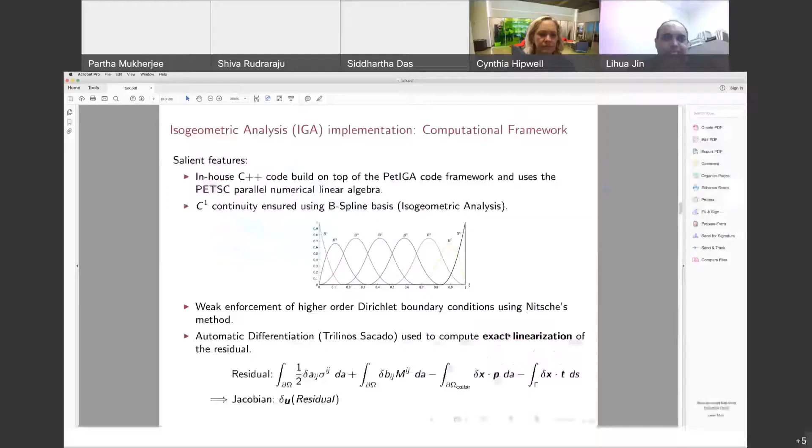In the meantime, Shiva, while you're sharing your screen, we just want to say thank you, because you only gave a few days' time, one week tops. No worries, it's really a pleasure, and I think it was sufficient time. I'm sorry I missed your first email, I'm glad you followed it up. We would like to thank you for organizing this and giving us the opportunity.

Yes, absolutely, it's a wonderful way to learn the work of so many people. I often look into the videos, and yeah, it's beautiful.

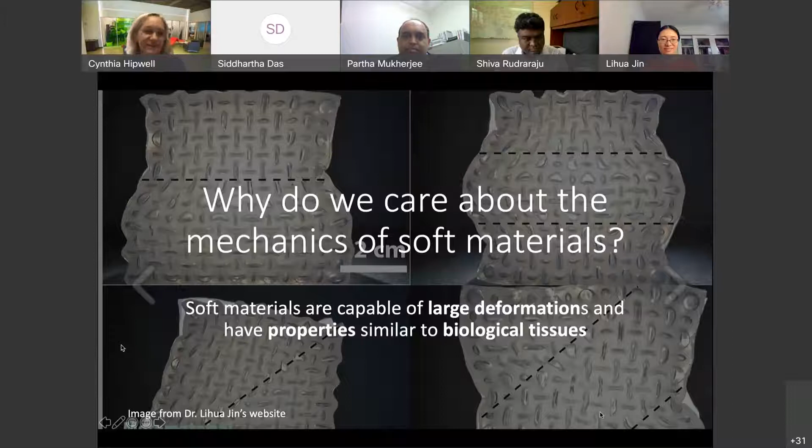Soft materials are capable of large deformations, and they have properties similar to biological tissues. This cool graphic here is actually from Dr. Jin's website, so we'll hopefully get to see more of that in her presentation.

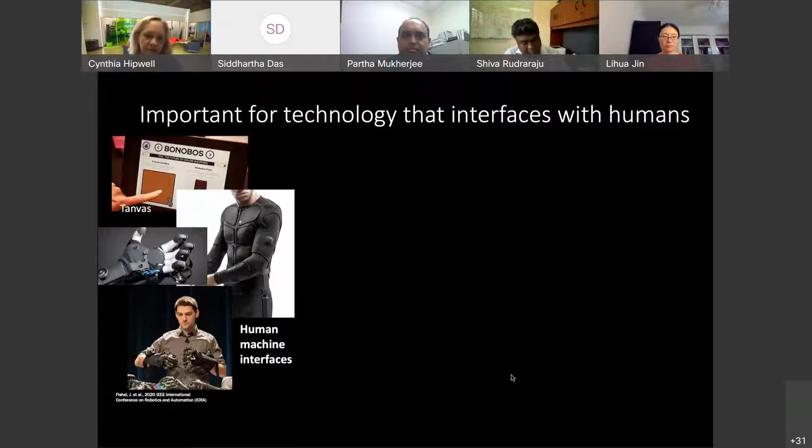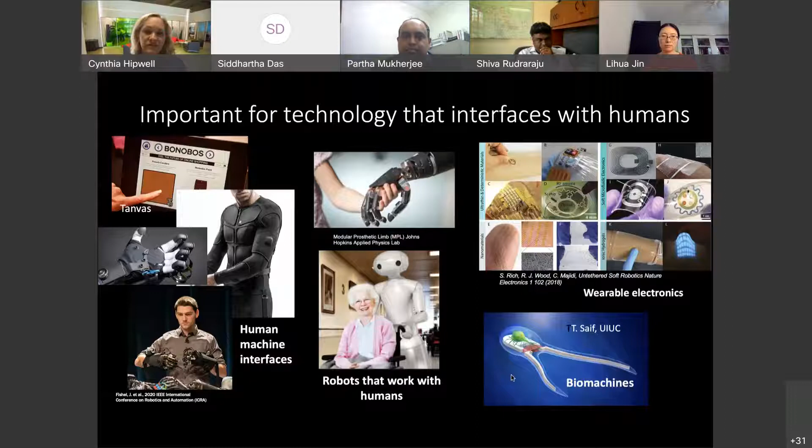This is important for technology that interfaces with humans. Examples would be human-machine interfaces for haptics, for remote touch, for being able to control human-machine interfaces with the body; for robots that work with humans so they're safe and able to interact with our soft tissues; for wearable electronics, devices that interface with our body; and also for biomachines, things inspired by biological phenomena or even self-emergent.

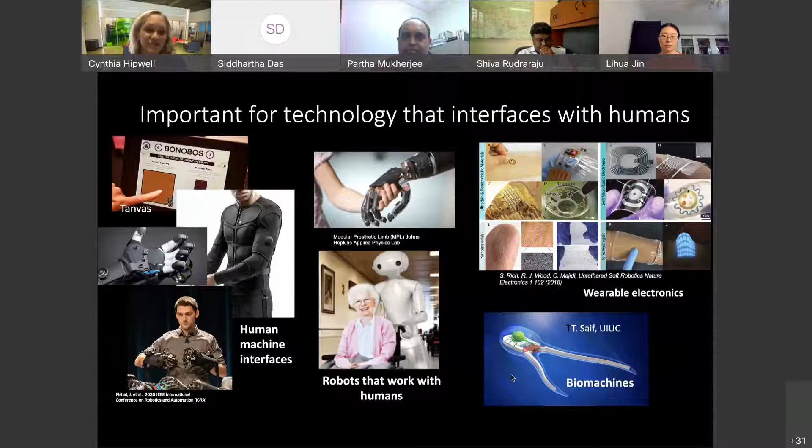So soft materials obviously bring a lot of exciting opportunity for technology, but there are a lot of challenges. We need to be able to do all the things we currently do with hard, active, electrical, and structural materials, but with soft materials. So we need active materials. We need to be able to produce a large force, often a large untethered force. We need to be able to modify friction, temperature, and optical properties, actively, with soft materials.

We need to be able to make soft circuit elements, the same types of conductors and semiconductors for wearable electronics. We have the soft interfaces, which is where our team is working, looking at how the soft materials interface with different machines and how those machines interface with them. And then looking at emergent behavior for machines that are based upon biological systems and can actually be designed to evolve over time. So there's a lot of challenges here to be able to match some of the same type of performance that we have in our hard material space.

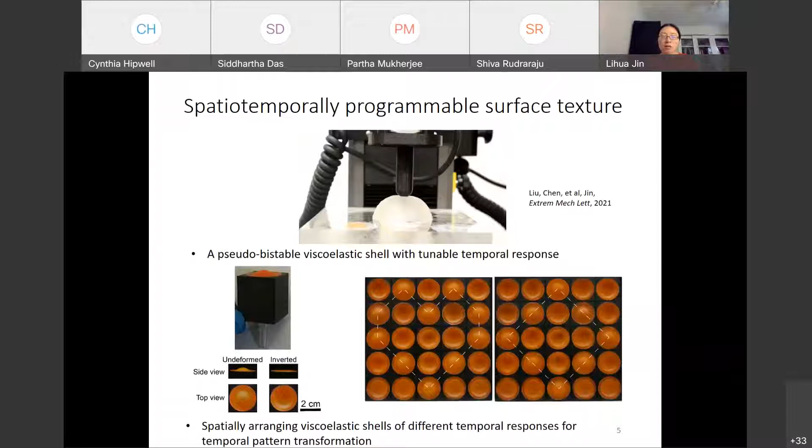To achieve that, there are a few challenges. First of all, we want to select a unit cell which can show temporal behavior. Then, moreover, this temporal behavior needs to be easily tuned by geometry or materials. Then we can combine those unit cells with different temporal behavior, and we can see a pattern evolution. And moreover, if we can further tune, assemble and reassemble, disassemble, reassemble those unit cells, we can see different patterns.

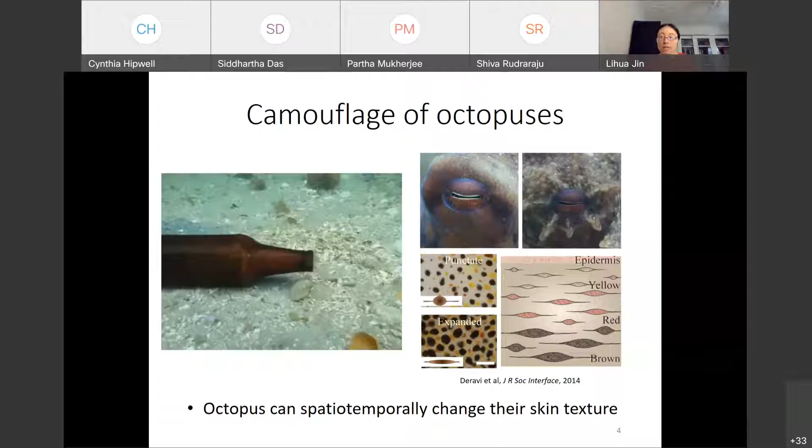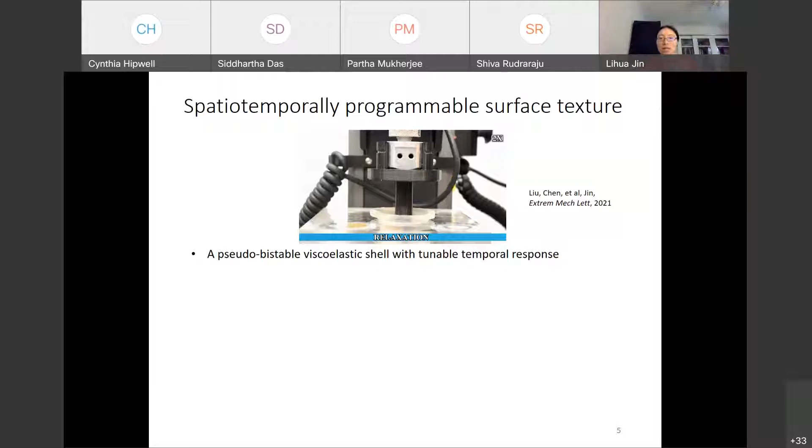Here are the unit cells we select. So we select a viscoelastic shell as our unit cell. What you see here is that we are indenting this viscoelastic shell. If I immediately remove my indentation, the shell is supposed to immediately pop back, so it is showing a monostable behavior. However, if I hold my indentation for a certain amount of time, as you see here, it does not immediately pop back.

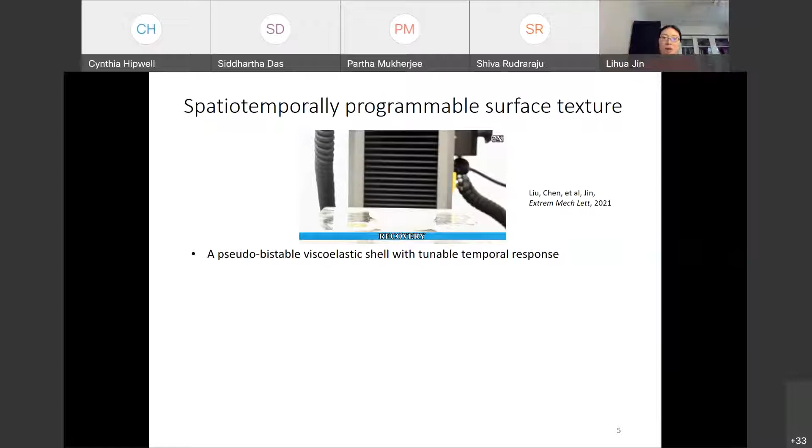But you need to wait for a certain amount of time and then it eventually pops back. This behavior is called pseudo-bistable behavior, such that it's a fake bistable. It can remain in the deformed shape or the inverted shape for a certain amount of time, but then after you wait for some amount of time, it will pop back.

Therefore, we choose this as our unit cell and bond it on a box and seal them, and then we can pneumatically actuate the deformation of the unit cell. Moreover, very soon I'm going to show you that by tuning material and geometry, we can significantly tune this snapping behavior. By combining this kind of unit cell together with different temporal behavior, we can pattern them into different surfaces, and those surfaces can also evolve as a function of time. Moreover, we can assemble, disassemble, and reassemble into different patterns.

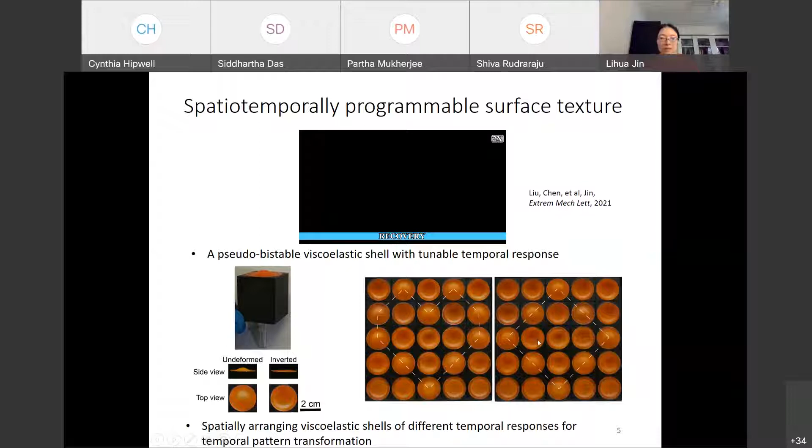Before I show you the experiment, let's first establish some theory to understand this behavior. So this is the shell geometry, and it is subject to a pressure difference. We hold the pressure difference for a certain amount of time, then plot the corresponding displacement, W here. As you can see, the displacement does not immediately recover to its undeformed shape, but it has to remain for a certain amount of time and then eventually recover its original shape.

The time we hold the sample we call T creep, and the time we have to wait we call T snap. Here we conduct both finite element analysis and also viscoelastic shell theory to analytically analyze this problem, both computationally and analytically.

To understand the mechanism, let me first plot the instantaneous pressure displacement relationship for different geometry. Here, D represents the shell thickness and R represents the radius of the shell. As you can see, the pressure displacement relationship first increases, then decreases, and increases again with the displacement. For some of the curves, it actually intersects with the x-axis, indicating a bistable behavior.

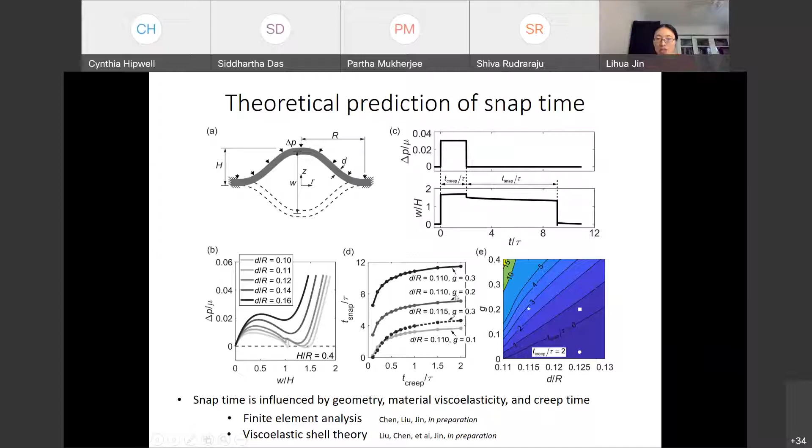Then once we understand this, we can build the unit cell and test the unit cell individually and also in an assembly.

Because this temporal behavior of the shell is intrinsically controlled by its material and geometry, in an assembly of those shells, we can use a single control by connecting all those shells together with a single control of sensor, valves, and pumps. Then we can simply control this complex spatial temporal behavior.

By a single control. As you see here, I'm showing you four different types of shells by tuning the geometry and also selecting two materials with different viscoelastic properties. We first extract air and hold for a certain amount of time. Then you see the second row pops first, after that the third row, and finally the fourth row.

Moreover, as long as we design the structure with a big enough box, we observe that the behavior of an individual unit cell and also in an assembly are similar.

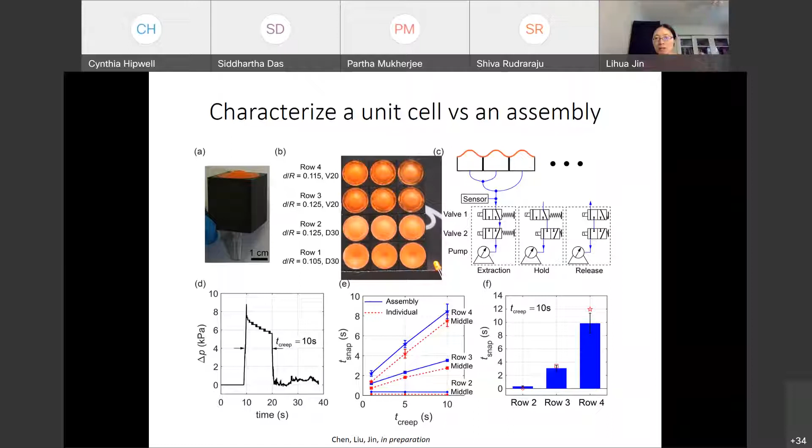Then once we have all those components, we can pattern them together to achieve spatial temporal surface evolution. What you see here is 3 by 5 unit cells, and we first extract air, and then after a certain amount of time we let it go. So you first see a number 5, and then you see number 6, and finally you see number 8. As you can see, those patterns can evolve as a function of time.

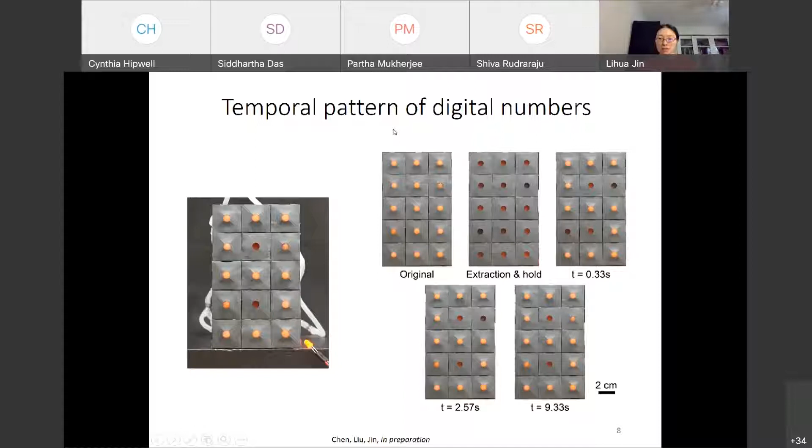We further demonstrate temporal patterning of an emoji. Again, we first extract air, hold for a certain amount of time.

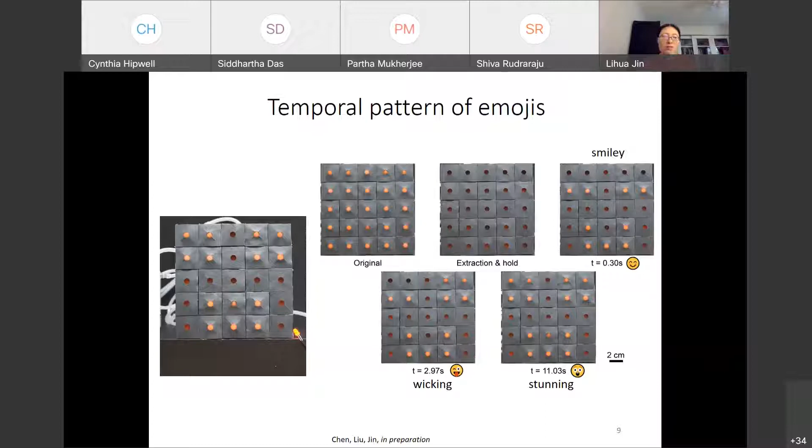Then we remove the load. You first see a smiley face, then a winking face, and finally a stunning face. With such tunable surface texture, we can actually achieve many other functions such as tunable friction, wetting property, and optical properties.

Next, let me show you a spatial temporal control of friction. We pattern our surface with different unit cells, then build a setup to measure the surface friction. We design the surface so that when all the shells are in the convex state, the friction is high. But when they're in the...

Concave state, the friction is low. When they are in the convex state, the friction is high. Therefore, we can measure the friction as a function of time. When we start, all the shells are in the convex state, such that the friction is high.

Then we extract air and the friction becomes low. Then we remove the load. As a control, the blue curve shows the case with all the shells in the monostable state, in the bistable state, such that once you remove the load, it's bistable, therefore they can stay in the concave state and the friction remains low.

But the black curve corresponds to the case where all the shells are in the monostable state. Once you remove the load, all the shells recover their original shape, showing high friction. The red curve corresponds to a mixture of different viscoelastic shells. As a function of time, you can see an increase of friction, and then after a certain amount of time, another increase, and then an increase again. Therefore, you can spatially and temporally control the friction.

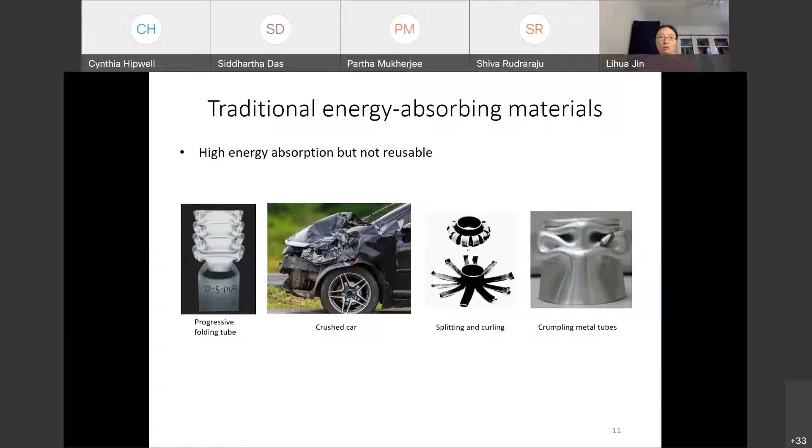Now let me switch gears a little bit to talk about energy absorbing materials. Traditional energy absorbing materials make use of plastic deformation or fracture to dissipate energy, so they can have high energy absorption, but they're not reusable. Our idea is to make use of snapback buckling of wide columns to achieve reusable energy absorption.

Recently, we discovered that if we tune the width-to-length ratio of a column, they can show very different buckling behavior. If you compress a column when the width-to-length ratio is low, what you observe is traditional Euler buckling, or here we call it continuous buckling. That means after the buckling point, if you gradually increase the displacement, the force gradually increases with the displacement.

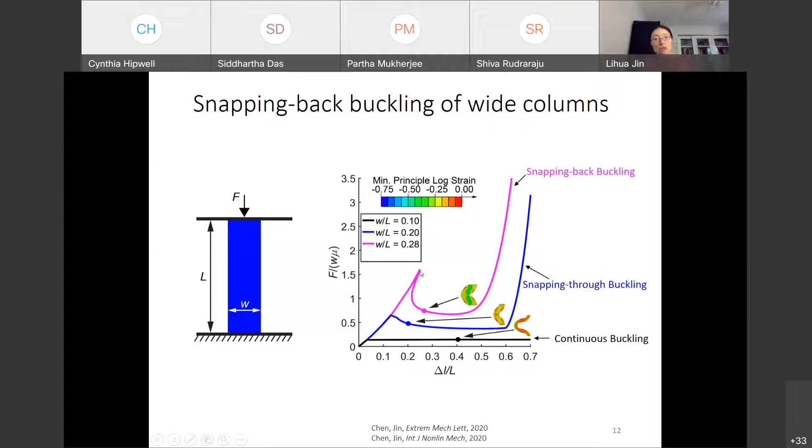However, if you increase the width-to-length ratio, you observe this snap-through buckling. That means after the buckling point, the force actually decreases with the displacement, showing a negative slope. If you further increase the width-to-length ratio, you observe this new snapping-back behavior: after the buckling point, both the force and displacement decrease along the equilibrium path, with the slope still remaining positive. We can make use of such snapping-back buckling to achieve reusable energy absorption.

That means if along this force-displacement curve you reach state point A1, and keep increasing displacement, it has to snap to state A2. Correspondingly, the energy also has a jump, and the energy difference between these two wells corresponds to the energy dissipation. If you further unload it, the sample will snap back from state A3 to A4.

So a column exhibiting this snapping-back buckling is capable of dissipating energy in a reusable, rate-independent behavior, because all the deformation is elastic. It's completely recoverable, and also self-recoverable, meaning after unloading it completely recovers its original shape.

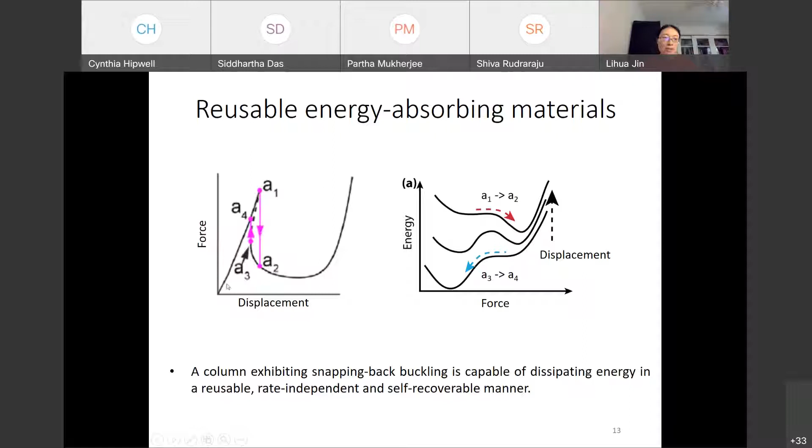Therefore, we want to stack such wide columns into a multi-layer structure, with each layer an array of wide columns, to achieve energy absorbing metamaterials.

Here is how we fabricate this material. We use multi-material 3D printing together with sacrificial molding. We first print this mold composed of PLA and PVA, then pour pre-cured silicone elastomer and cure it. Eventually we dissolve the water-soluble PVA and are left with this metamaterial. Finally, we also need to add some hinges as constraints, so we can achieve the deformation modes we want instead of some global buckling.

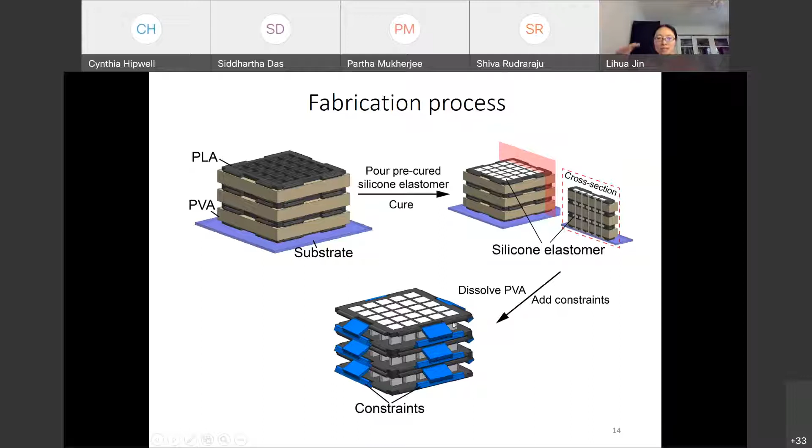Here I'm showing you the behavior of this metamaterial. When you load the sample, you can observe 8 peaks here corresponding to the buckling of these 8 layers, and you observe a long force plateau.

During unloading, again you observe 8 peaks corresponding to unbuckling of the 8 layers. The loading and unloading curves show a large hysteresis between them, indicating energy dissipation. Once you unload the sample, it recovers its original shape immediately, indicating reusability and self-recoverability.

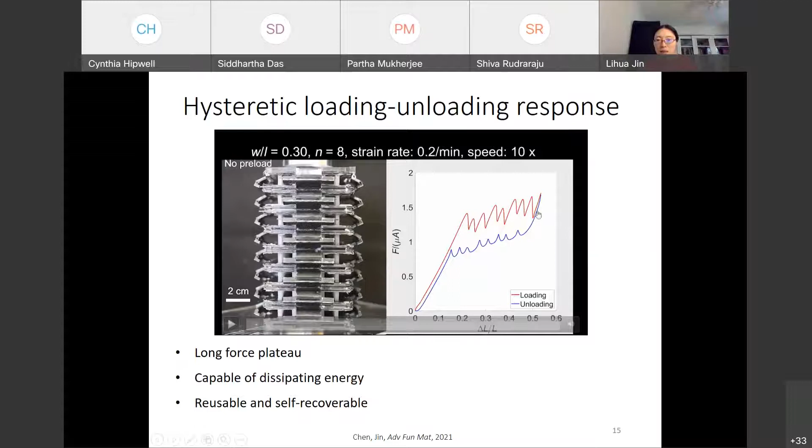To understand this zigzag loading and unloading curve, we developed theory to predict the behavior. We start with the force-displacement curve from a single column, then simplify this multi-layer structure as a chain of columns connected in series. The external force equals the force in each column, and the external displacement equals the summation of the displacement of all the columns.

Given an external force, or a force in a column, there are 3 different possible displacements. If you have a chain of columns, this becomes a combinatorial problem, and you can have many possible displacements corresponding to all the branches you observe here.

However, not all the branches are stable. We examine the Hessian matrix to determine the stable branches, indicated by the solid curves. You can either connect the solid curves directly, or if they're discontinuous, connect to the neighboring one. This determines the loading and unloading paths, and the area between them corresponds to the energy dissipation.

Here I'm showing the loading and unloading paths for columns with different width-to-length ratios and different numbers of columns stacked together. As a result, we see that the energy dissipation of snapping-back columns is higher than snapping-through columns, shown here under the same n, and it grows faster with n.

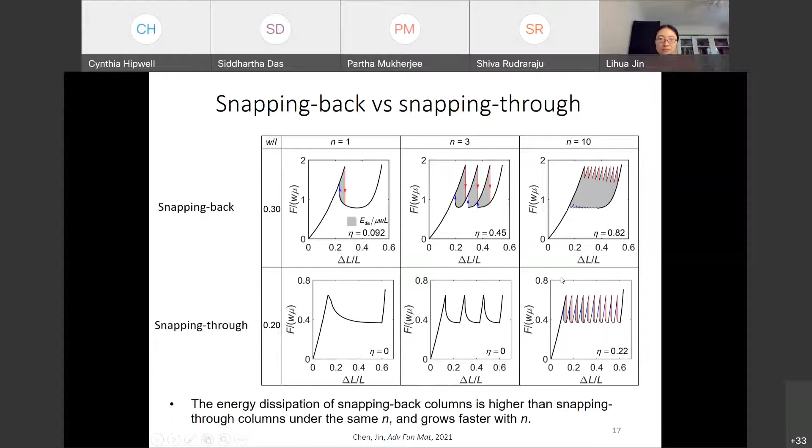Here I'm comparing the experimental result and theory together. As you can see, they agree relatively well with each other, and please note there is not a single fitting parameter in this theory. You may ask what is causing the deviation - I can tell you that's merely because of imperfections in the experiments.

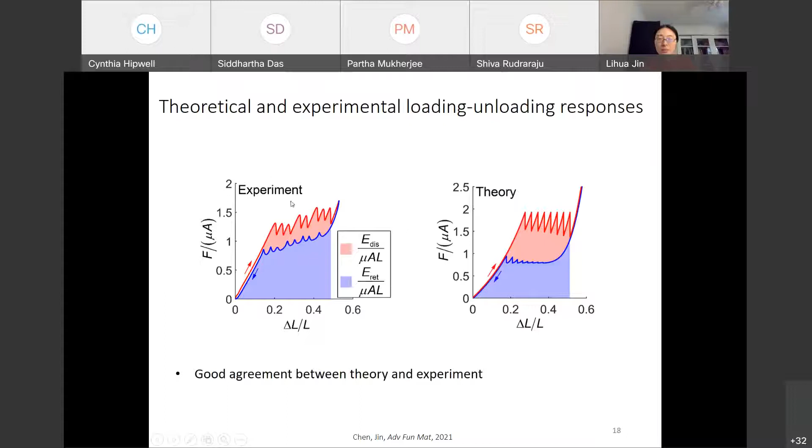Further, we conduct drop tests to examine the energy absorbing property of these materials. We throw the sample from a certain height to mimic an impact from the bottom, and then measure the peak force at the top.

Here I'm showing the measurements of peak force as a function of the different amount of energy impact at the bottom. As you can see, the peak force reaches a plateau over a wide range of external energy, corresponding to a force mitigation region due to the column buckling.

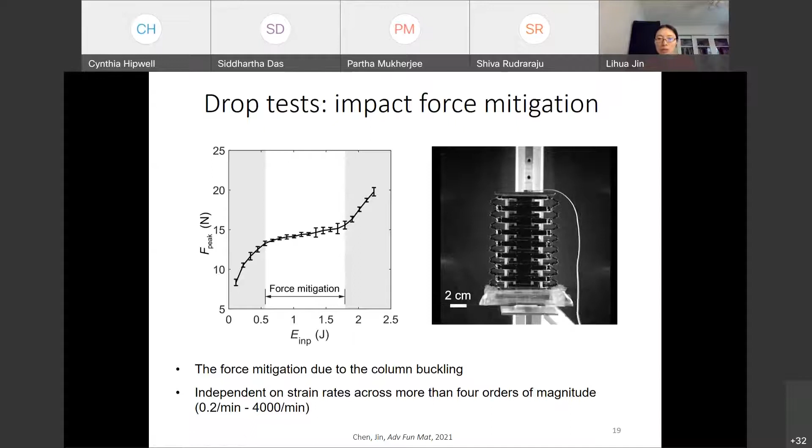Moreover, we notice this peak force agrees very well with the peak force measured in static tests, indicating rate independency across a very wide range of strain rate. And if you notice in the video, after the impact the sample almost doesn't bounce back, indicating energy dissipation in this process.

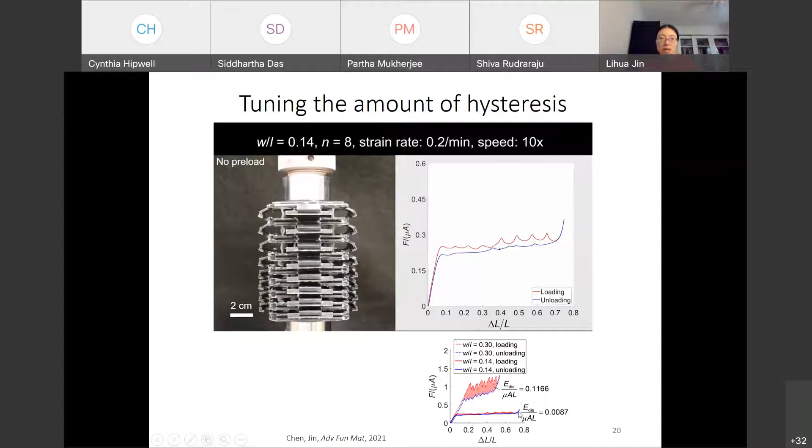In this example, I showed you that making use of snapping-back buckling of wide hyperelastic columns, I can achieve reusable energy absorption. However, because the property comes from hyperelastic material, the amount of energy absorbing is limited since these materials have low stiffness. So we need to think about whether it's possible to achieve high energy absorption capacity while still maintaining reusability, using different energy dissipation mechanisms that can be reusable with no damage to the material.

Then we came up with the idea of making use of friction of materials. We designed a granular metamaterial by integrating granular materials and elastic components for energy absorption, with 3 different designs: the first is cylinders bound by elastic bands, the second is spheres threaded by elastic strings, and the third is spheres wrapped by elastic membranes.

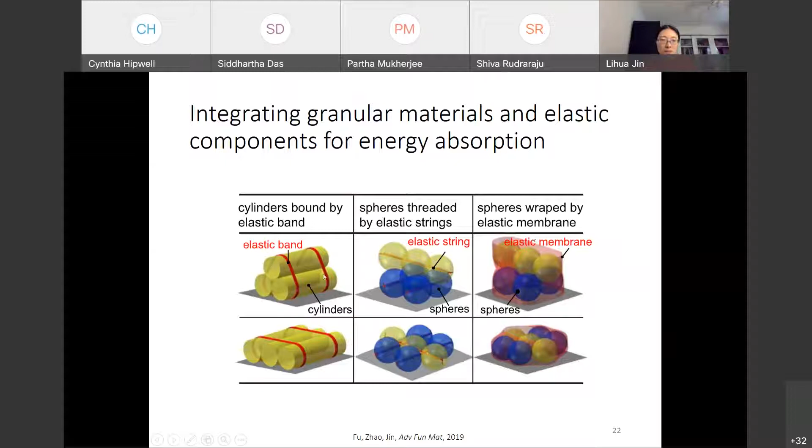Let me first show you a case of cylinders bound by elastic bands. In all these metamaterials, those granular particles can slide between each other to dissipate energy. But because of those elastic components, they can maintain the integrity of the structure and eventually recover to its original shape.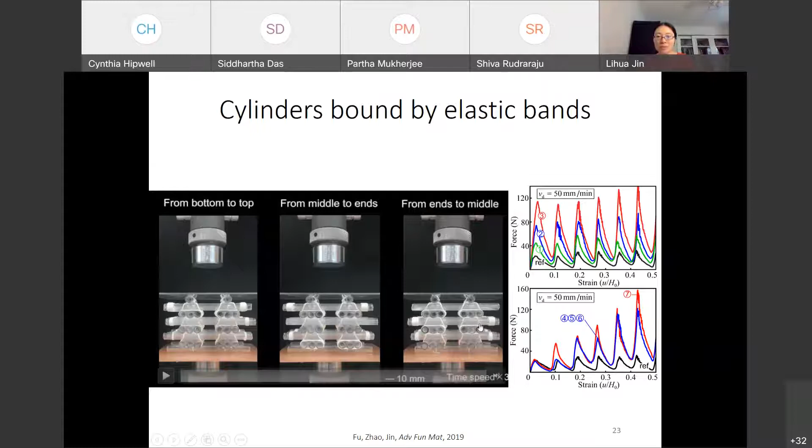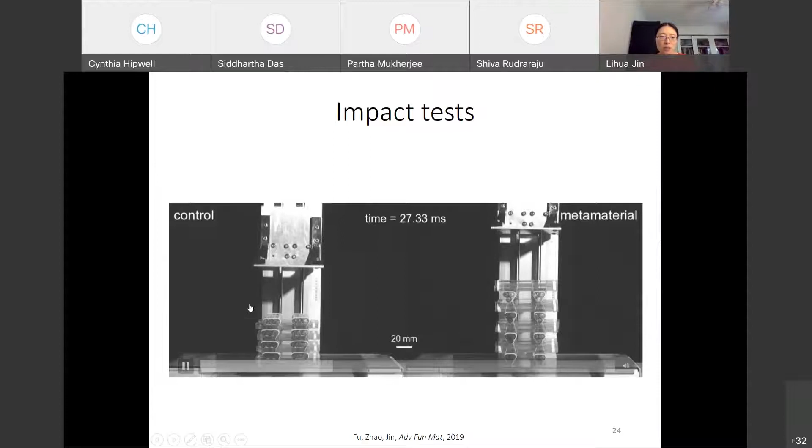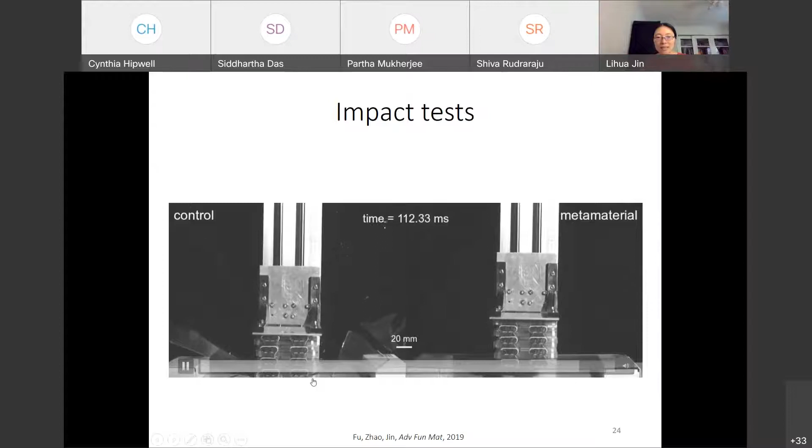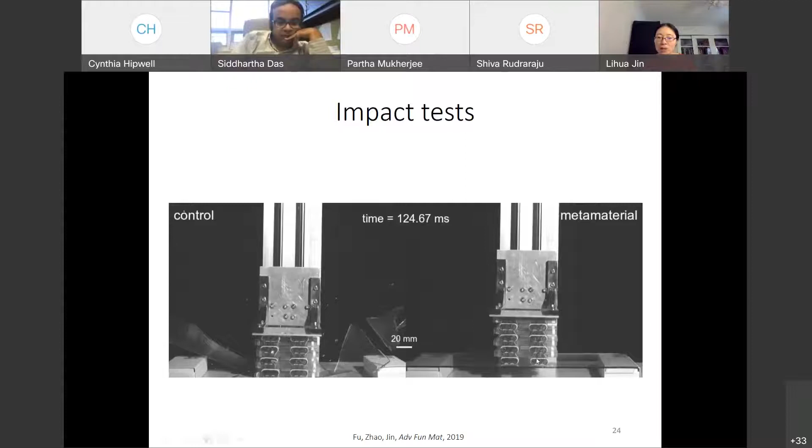I'm also going to show you the performance of the metamaterial through an impact test. On the right-hand side is this metamaterial with an 8-layer structure, but on the left-hand side, as a control, we show the metamaterial in the fully deformed state. At the bottom, you see a single supported glass with the materials in between to protect the glass from an impact. As you can see, for the control experiment, the glass is completely broken under high impact and scattered everywhere. But on the right-hand side, even with a high impact, the glass remains intact because the metamaterial can dissipate a lot of the impact energy.

Finally, I'm also going to show you another design, spheres threaded by elastic strings. In particular, we can design completely different symmetries. The left one we call interstitial orthogonal tetrahedral symmetry, and the right one we call dense orthogonal cubic symmetry.

You compress this metamaterial and unload it, and as you can see, we can tune its force displacement curve. More interestingly, when we unload, the sample on the right-hand side can completely recover, while the sample on the left-hand side cannot, because the friction trapped it in the deformed state. So therefore, all the properties can be tuned.

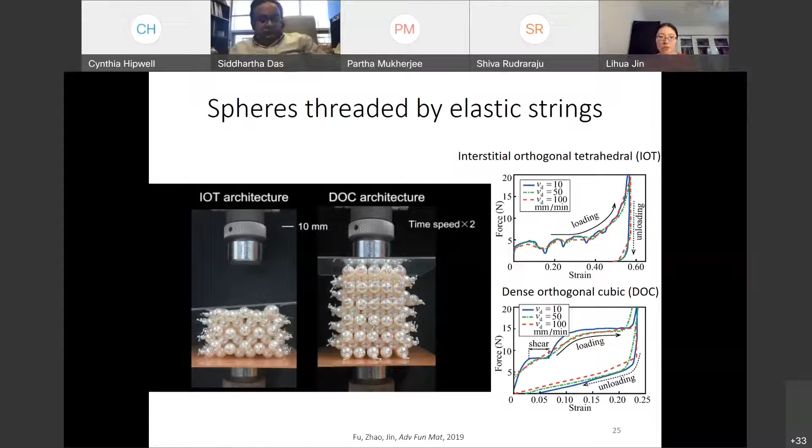So now let me summarize my talk. I first talked about the design of spatial-temporally programmable shape-morphing metamaterials. Then I showed you two examples of reusable energy-absorbing materials, making use of snapping buckling of wide columns and the friction between granules. What's more important is that these are all metamaterials, and their behavior can be widely tuned by changing the geometry and material designs.

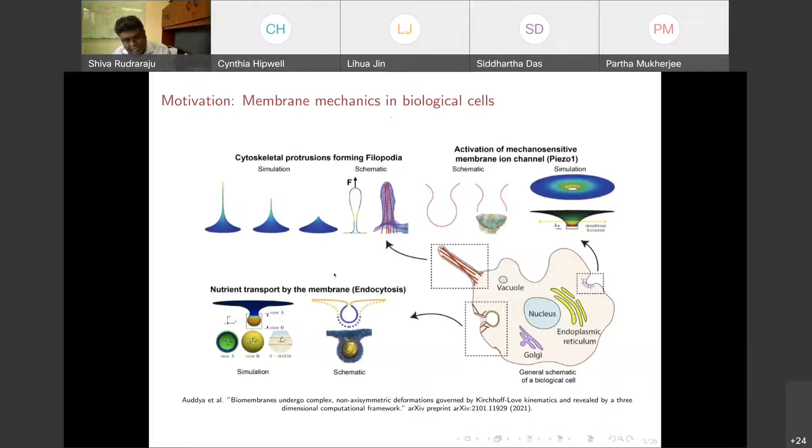Here I have a collage of three different problems I'll be talking about today. On the top left is filopodia protrusion, one of the mechanisms by which cells walk. On the top right is one of the mechanisms by which cells open channels for material to flow in and out — the Piezo-1 protein activated dome formation. And a very exciting application is on the bottom left: endocytosis. I'll make a strong connection to how this is essentially what's causing havoc with the world in terms of the COVID virus. With these three as the central applications for today's talk, I'll set the mathematical context for this work.

Biological membranes — on top you see this cartoon of how a biological membrane looks. They're extremely thin membranes, but they're actually fluidic membranes, not fully solid. They have a much more fluidic or viscoelastic behavior, with a complex set of lipid bilayers and hydrophobic, hydrophilic protein distributions. It's a very dynamic environment.

But for the problems of our interest, we're not interested in all that immense complexity. We're interested really in the mechanical stiffness of the membrane and how it modulates the morphology or shape. The very first challenge goes to 101 mechanics or kinematics: how do you represent the geometry? Traditionally, we'd use a Euclidean basis, but membranes are really two-dimensional manifolds embedded in 3D space, so a 3D basis like XYZ would get us into numerical or mathematical complications.

The natural setting is to use a coordinate-free description, or a curvilinear coordinate system, wherein the basis advects along the shape. That's really the natural structure for these structures. So we adopt that, and I'm providing the reference and current configurations — the non-deformed and deformed configurations — for a generic membrane.

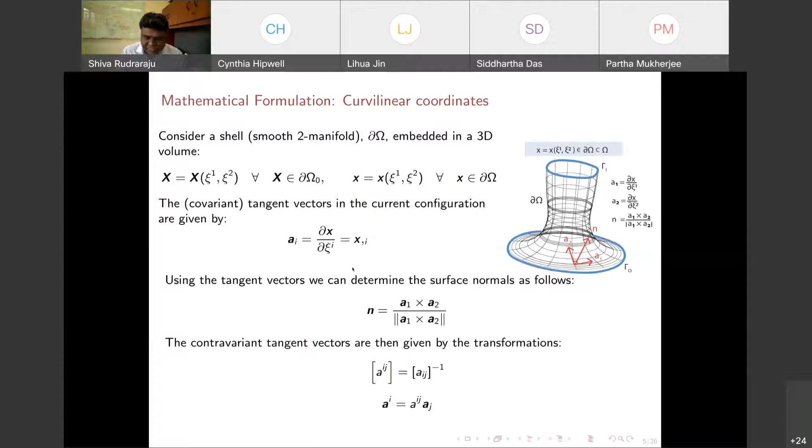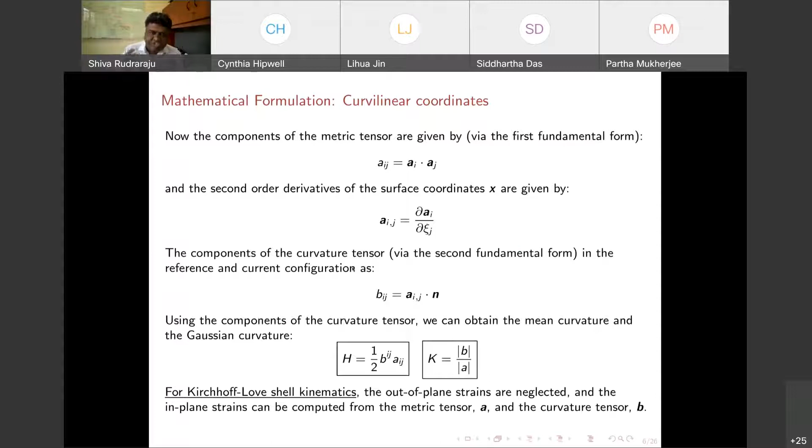A couple of slides on how we set this up, because the whole goal of this part of my work is developing a mathematical model, a numerical model, and then applying it to different problems. The core of this is the standard curvilinear coordinate setting, where the basis consists of tangent vectors, from which we get to the primary geometric quantities of membranes: the metric tensor, and through the second fundamental form, the curvature tensor. The metric tensor and curvature tensor are essentially equivalents of strain and curvature in more regular mechanics — they let you track the geometry and see how it's changing.

And further, we get to special invariant forms of those, which are the mean and Gaussian curvature, H and K. By tracking the change in these two curvatures, one gets to know how the geometry is evolving. The specific kind of kinematics we induce is called Kirchhoff-Love shell kinematics, a very ancient and classical kinematic theory for surfaces.

The assumption is because the membrane is very thin, the out-of-plane strains are neglected, and we only treat the in-plane strains, which can be found from the metric tensor and the curvature tensor. Again, these are highly simplified forms. If I were to expand any of these, they would expand out to a few lines, if not a few pages, as you'll see next.

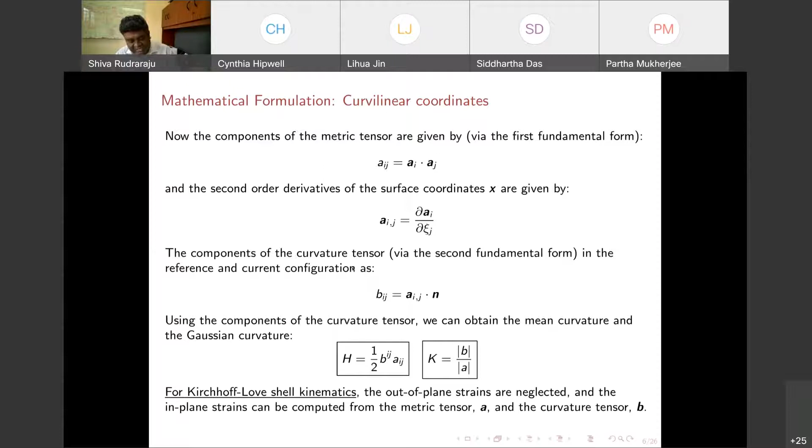So with that setting of the geometry, we jump into the governing equations. There are two kinds broadly. As I said, we are interested in mechanochemical phenomena, mechanics and chemistry, sometimes acting individually, sometimes together. Mechanics sometimes induces chemistry, and chemistry modulates mechanics. So we're interested in mechanochemical phenomena, a coupled multiphysics problem.

At the ground level, we are first interested in the governing equation for surface mechanics. On top is the momentum conservation equation in terms of the stress and the moment, where P is the body force and T is the traction vector.

I don't want to get into any of these derivations. We assume a hyperelastic setting, and starting with a well-known form of energy for these membranes called the Helfrich energy, we derive the stress and moment terms, and all of this is completely differential geometry. That's the setting for all these derivations. In the context of membranes, this was first done by Sauer et al. very recently, and they developed this proper treatment, which was my point of departure to adopt these models.

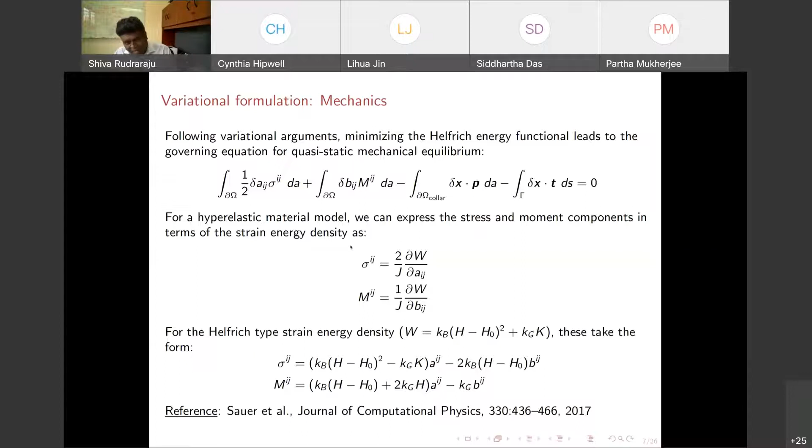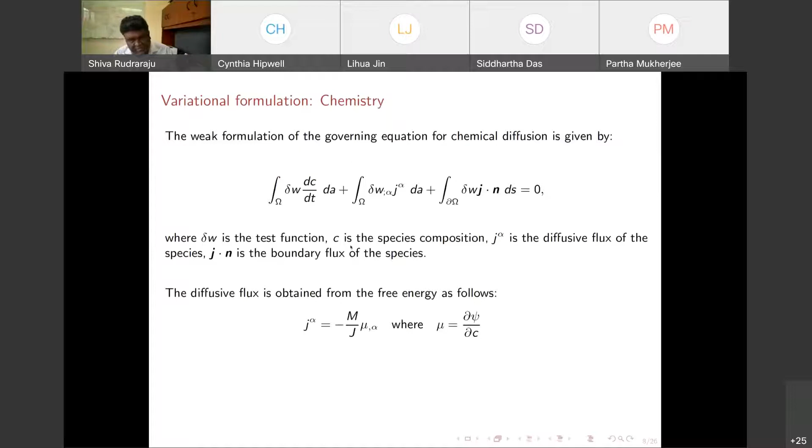Likewise for chemistry, the most simplified essential ingredients are how the mass is diffusing, in terms of a surface representation of the Fickian diffusion model. What you have there are the surface fluxes and the chemical potential coming from the free energy. I could get into any amount of detail, but roughly with that math, that was the first step, the mathematical characterization of these processes.

The second step is to put them in a numerical framework. The central challenge with membrane modeling, as some of you may know, is the continuity requirements. They have to be continuous, you cannot have kinks and other things. So selecting the correct numerical basis is very important.

We adopt a more recent evolution in finite element analysis, not so recent, maybe at least a decade, called isogeometric analysis, where essentially the bases are splines, which give us high fidelity control over the curvature and the fields on that curvature. We adopt that framework and implement everything in-house. We develop our own codes and use a lot of mathematical recipes to get around problems.

One issue is these are very higher order partial differential equations—sorry if I forgot to mention that, all of these are at least fourth order PDEs. Given these higher order equations, there are difficulties enforcing boundary conditions, so we use something called the Nitsche procedure. And if one were to expand the governing equations, it would be at least a few pages long, and one is bound to make mistakes. So we adopt more state-of-the-art techniques of automatic differentiation to automatically generate our set of governing equations.

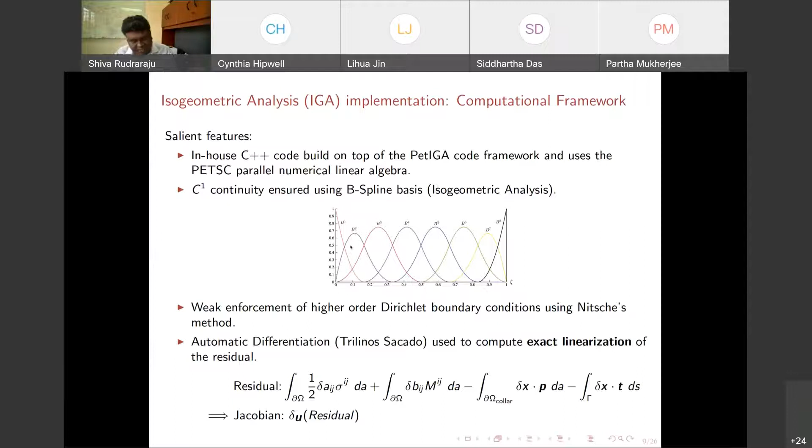With that numerical setting, I'll move on to the problems. But before that, this is the summary of what we do with various biophysics problems. We take any given biomembrane phenomenon, first understand the mechanics and chemistry processes, then define it as a boundary value problem—essentially what are the boundary conditions, load conditions, spatio-temporal evolution—and we identify the kinematics, transport, and mechanics processes, putting all of that into a variational formulation. Then we take this into the computational framework of isogeometric analysis, and then comes the hard work: students run simulations, do parametric studies to understand these problems, or figure out various phase diagrams. With that, come the applications I'm going to present today.

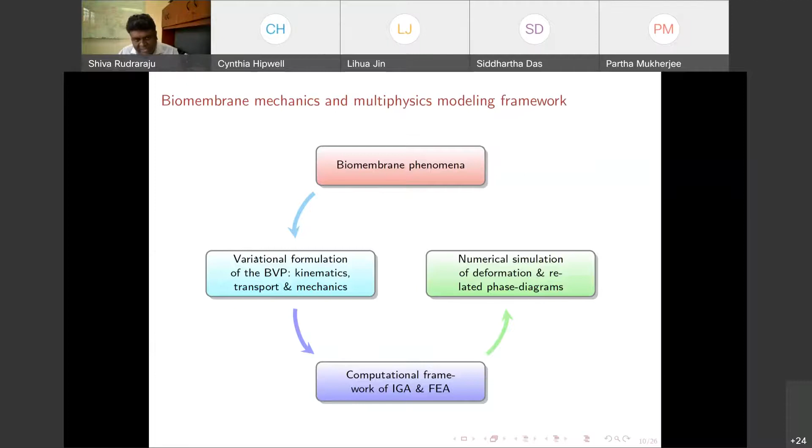Here I'd like to take a minute's break and emphasize the goal—it's not purely numerical interest in these problems. A central challenge with modern biophysics is that a lot is known qualitatively. People know phenomena A leads to B leads to C. But when one tries to precisely quantify them, that's when you open a can of worms, because when we model, we cannot just say A goes to B somehow—we model with partial differential equations.

We need precise boundary conditions, precise parameters. And when we put that in, we realize A really doesn't lead to B. So if I were to summarize, our motivation is to quantifiably verify and validate what is qualitatively known in the biophysics community. And we adopt that principle and apply it to all these three problems, and a couple more problems later.

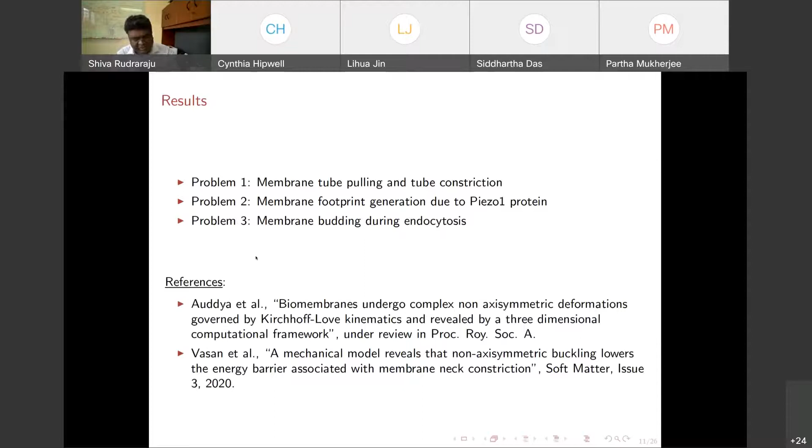These results I'm presenting are in these references for those of you who are interested. The first problem is that of membrane tube pulling. Cells have this membrane, which is the outer layer, and the membrane actually stretches out. It's really that stretching mechanism that forms these tubes, like filopodia-like tubes, and that's how cells have a lot of processes which are enabled. Most importantly, that's how cells walk. If you ever looked at bacterium walking, it forms these tubes and really uses them as anchors to walk.

The way these structures biophysically manifest is you have the membrane and you have a huge scaffold of proteins which push the membrane out, hold the membrane at a given height, and sometimes in other phenomena they have to truncate the membrane out. So we wanted to understand this process. And the very first step in every problem is to identify its mechanics and chemistry and define its boundary conditions.

Here, the boundary conditions - we essentially have the surface representation, and we apply various displacement, angle, moment, and traction boundary conditions. All of these numbers are either from literature or experimental evidence. And then we try to validate - do these numbers make sense for this specific phenomena?

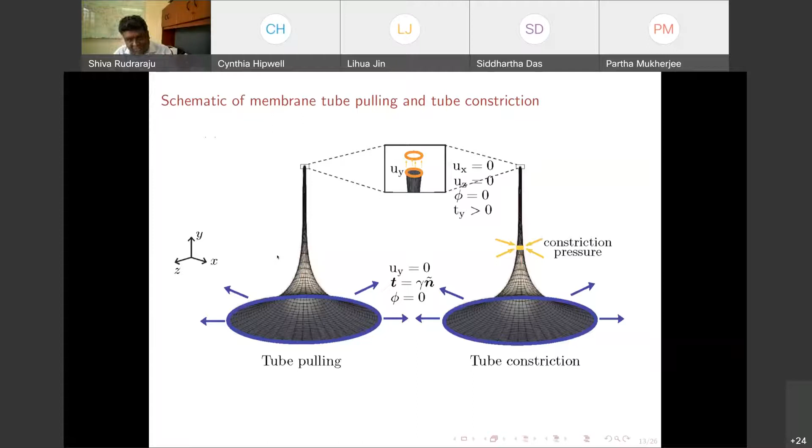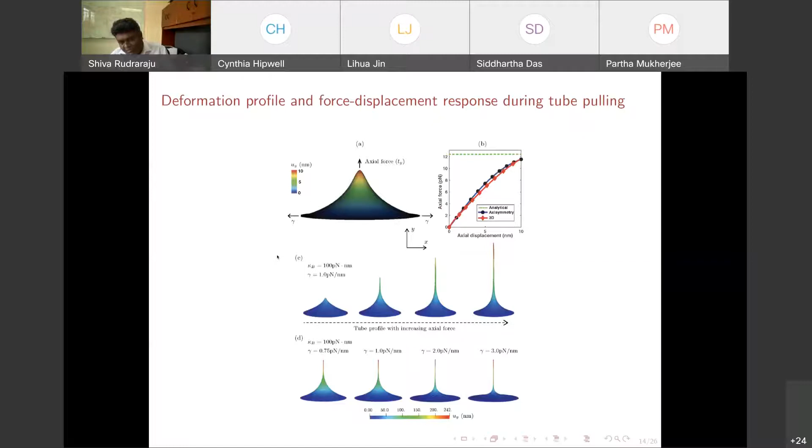We don't have any restrictions on symmetry as against more traditional axisymmetric methods. So we do validate against existing understanding of force displacement for these. But now, having validated this, we are able to do much richer problems which are not accessible to analytical or axisymmetric methods. A good example of that is this problem, which is essentially membranes that, when stretched for certain processes, have to be pinched.

Pinching is a way to chop the membrane, and proteins do this - they try to package membranes by chopping them. So we took the mechanisms which are understood, applied the loads, and then found something very fundamental in this problem, which is now published in Soft Matter. The classical understanding was it's an axisymmetric pinching, and proteins have to apply a certain force.

After a lot of study, what we realized is there's a buckling-like instability, a structural instability in these geometries. And if proteins were to attack those instabilities, they could get the job done with 1/10 of the energy spent. So that's what these pictures show - the axisymmetric solution is symmetric, whereas when we apply the full 3D solution, you see that it's no longer symmetric pinching, but has this more flattened pinching profile.

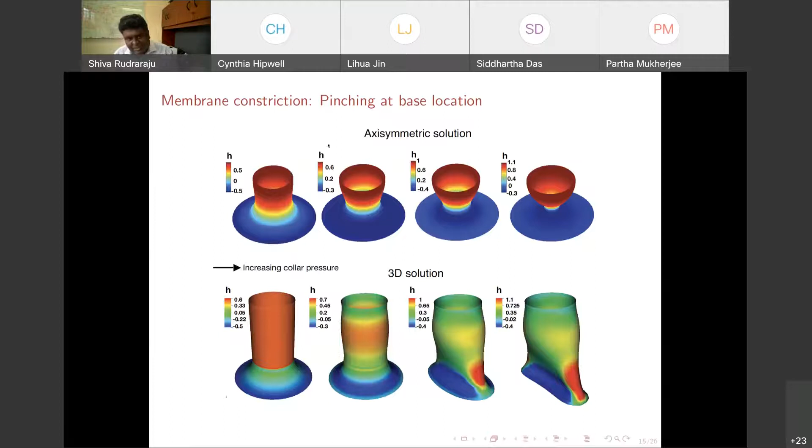Another thing we found is that it matters where you pinch. The protein can decide to pinch this sort of tube-like structure at the cap, at the tube location, or the base location. It really turns out it's all about the location. The proteins have to assemble at specific locations, and they can get their work done with 1/10 of the energy spent. We validated these numbers both in terms of how much pressure is required, and where are the instabilities and what are the correct points for the proteins to attack.

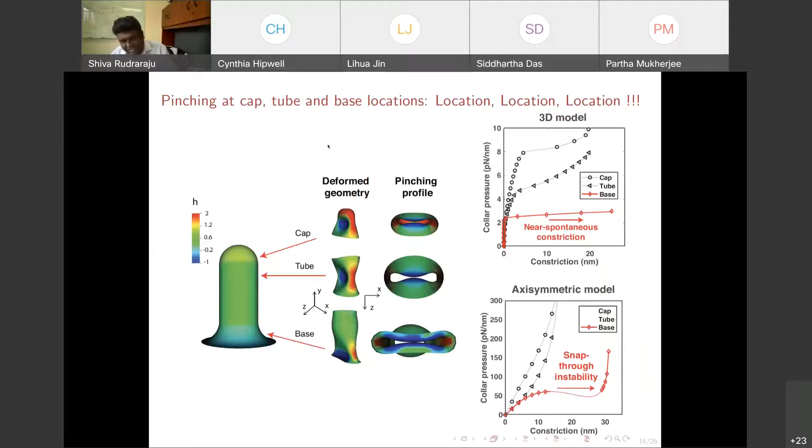Of course, this is all numerical predictions, and we are behind experimental - we are trying to get some experimental validation of that. If I can briefly show you one small simulation of how this happens.

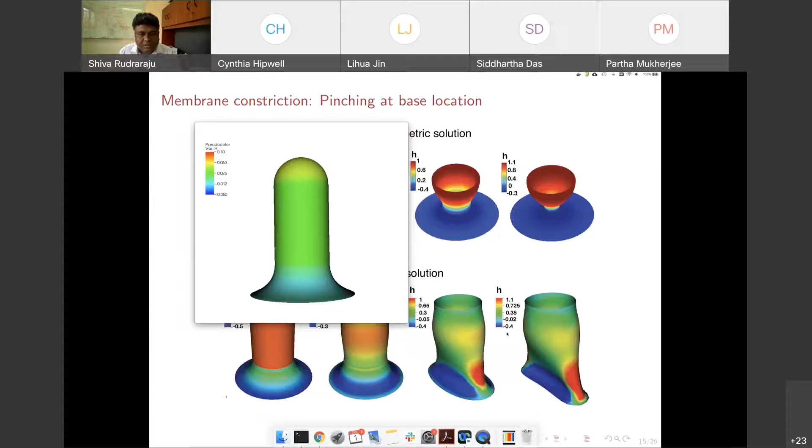So as you're probably seeing, this is a membrane which we are applying a symmetric load, and you'll see it flattening and collapsing. Essentially, there's a lot of protein scaffold which is providing the forces which are not represented here - there is the collapse. But this is happening at 1/10 the force, whereas it would have taken much more force if it was a symmetric collapse.

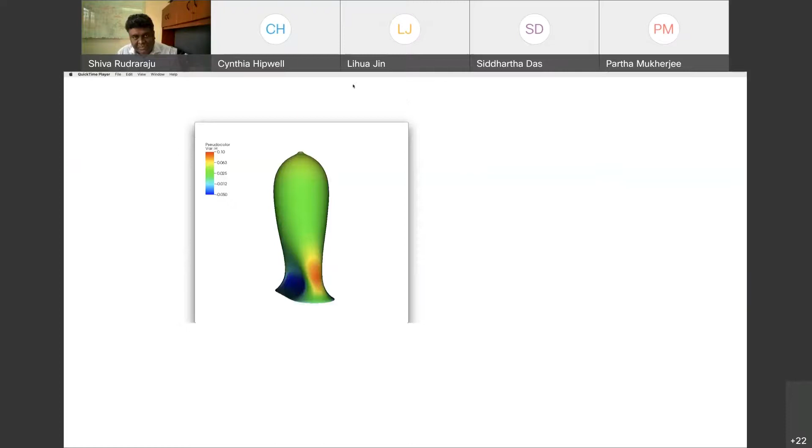So, back to the talk.

A second problem of interest is that biomembranes have channels which have to be opened and closed. Essentially, that's how material gets inside and out of cells. One of the channels is called the Piezo 1 mechanism, wherein mechanics, the application of forces on the membrane, really closes and opens these channels. It's a beautiful configurational change process.

If you're looking at figures A and B, B is a flattened figure where you have three arms which make up the protein. Under certain conditions of mechanical loading, these three arms actually rotate and flip, and they pop the membrane out. The popped state is A, the activated state. So the protein, by popping and unpopping, can go between activated and deactivated states.

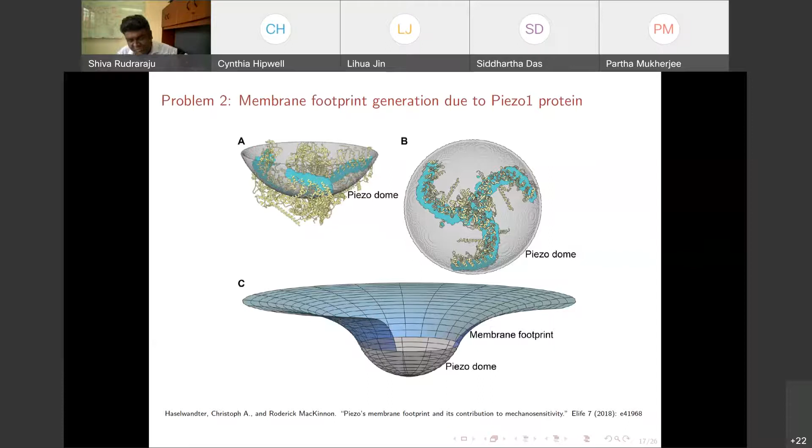On the bottom is the geometric representation of this process. The piezo dome is where the protein accumulates. This is again the boundary conditions—I don't want to get into that.

What we are able to show is that we can quantify under what surface tensions or mechanical loadings we get a good amount of gating response, the opening and closing of those channels. The hole at the center is the channel. So essentially, this shows how much work the cell or the proteins have to do to let material inside and outside. This is a parametric study with respect to the surface tension.

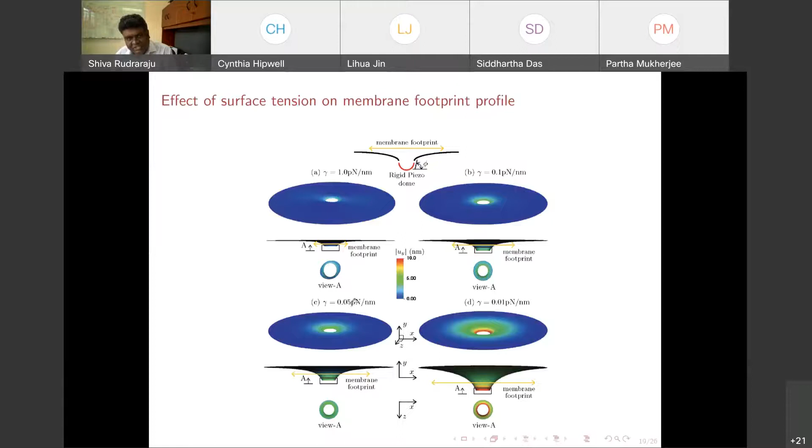Given the short time, this is the more exciting problem—I promised to make a connection to COVID. This is a very central mechanism in all cellular processes called endocytosis. This is essentially how material gets inside a cell. You just can't walk into a cell.

You have to request the cell to open the gates, and it gives you a special packaging to save it from the immune response of the cell. Then the packaging takes you inside into the nucleus. And what better example—at the bottom you have a virus, and this is every day what the COVID virus, or any virus, tries to do.

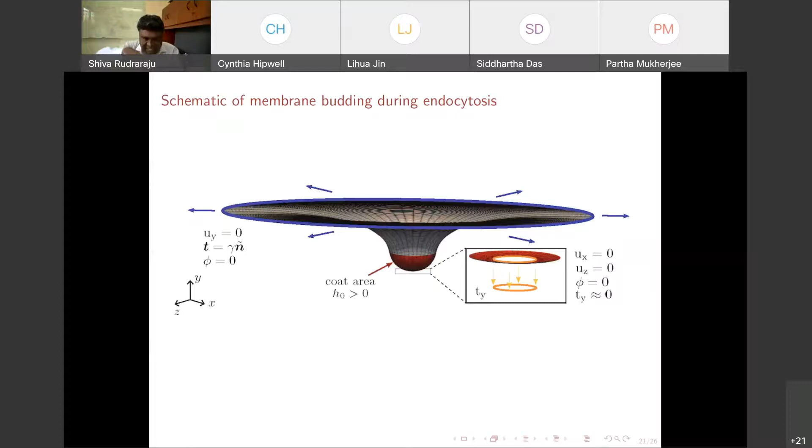So our interest is to take the conventional understanding of endocytosis and see what forces are involved in this dome-like structure forming, and how this packaging happens. We quantified—it took us a long time to quantify these boundary conditions. The coat area, that red area, is where curvature proteins accumulate and create that shape. That's how the virus or nutrients come in and sit in that bump, and then they close the hole.

We did a couple of very detailed studies, and Shoshan took the lead on this. What we did is study the effect of protein curvature on how the shapes are generated. We show that there is symmetric shape evolution, but there are also pathways of instability, where you can pop into unstable structures and take advantage of those instabilities to package much better.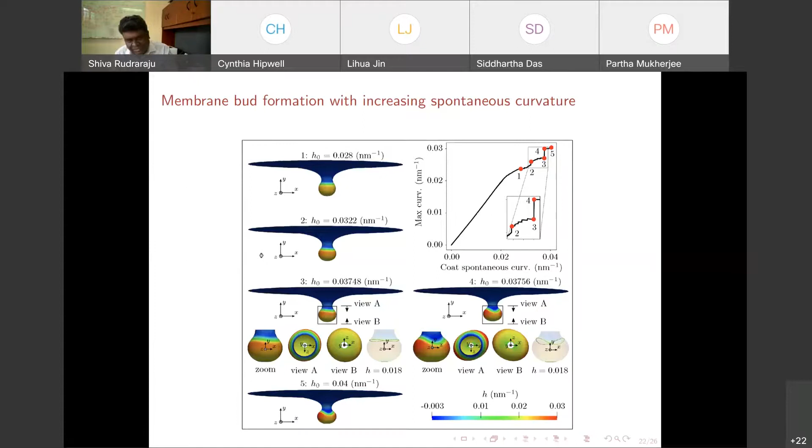Probably a thousand of these simulations are finally captured into this phase diagram, where we show there is an area of symmetric and asymmetric packaging available. Proteins may prefer to get into the asymmetric side, which is essentially selecting the right amount of area they want to recruit, and the right amount of curvature they want to induce to produce those shapes. They have beautiful two-fold, three-fold, and five-fold symmetries which come out of this.

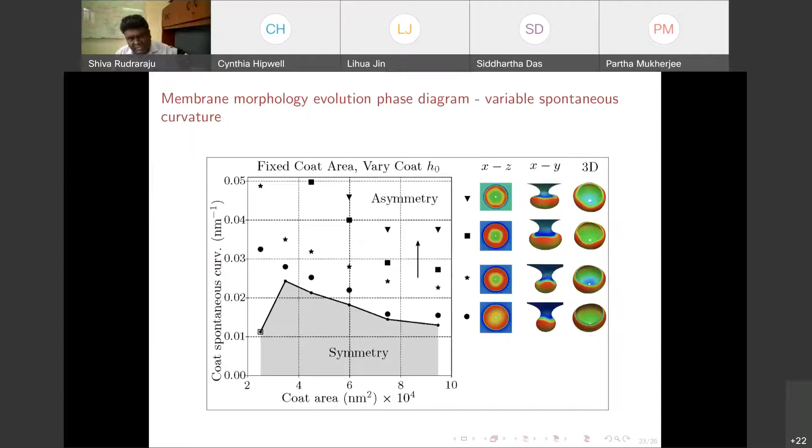With that, this is the last slide—the fourth problem of interest, where all my entire group's biophysics efforts, all hands on deck, is trying to model the mechanochemistry and electrostatics of neurons. We are looking at single neurons and asking: how much load can a neuron take, and when does it fail? This involves very detailed viscoelastic modeling of the neuronal membranes and surrounding material.

An equally important problem: we all know neurons conduct electricity, and this is mostly done through something called the Hodgkin-Huxley model, which got the first Nobel Prize in biophysics in the '50s. But it's an ODE model—it says a great deal about the mechanisms, but there are a lot of missing details today about how an electrical signal jumps through something called the myelinated part. If that jump didn't happen, our IQ would be about 100 times lower than it is.

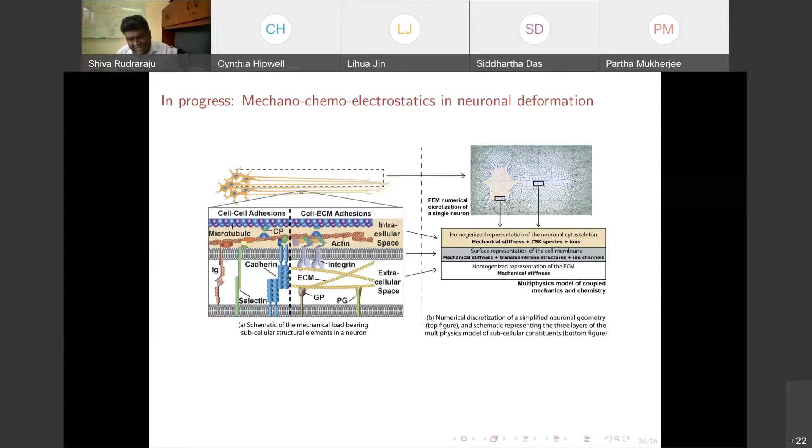So we are trying to look at electrical conduction using various processes, trying to answer how the signal conduction happens so fast, and how that's related to the mechanics. I only have a very basic simulation at this point to share with you.

So as you probably see, this is essentially the electrical signal passing through along the axon. And what are represented are potassium ions, sodium ions, and a lot of chemistry is shown in that plot.

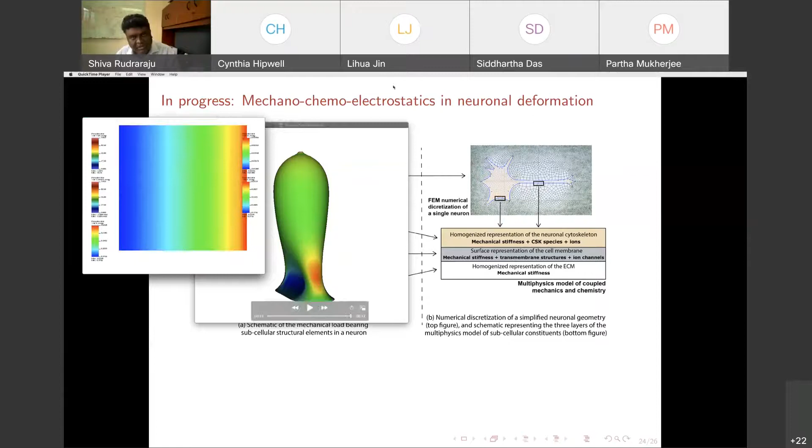Anyway, quickly, I want to end the talk. So with that, I'd like to summarize. What I had tried to show is our effort at developing a robust numerical framework for modeling mechanics and multiphysics of membranes using the framework of Kirchhoff-Love kinematics.

What we have already achieved is we have modeled 3 different problems: membrane pulling, piezo-1 dome, and endocytosis. What we are currently working on is understanding electrostatics and mechanoelectrostatics in neurons, and another process called phase transformation on giant unilamellar vesicles.

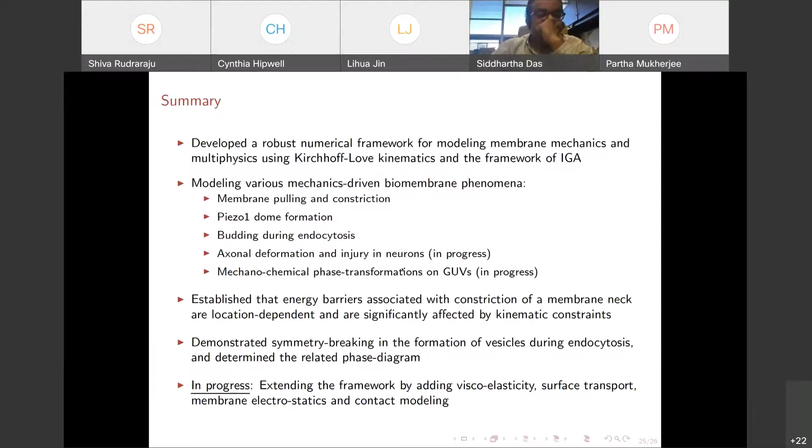What we have established is that in the problem of membrane necking or membrane pinching, there are favorable energy barriers which could be used to get the job done by the proteins. Also in the process of endocytosis, we obtained a phase diagram and showed that there are symmetry breaking pathways which are more favorable. But as I said, biophysics of membranes is enormously complex.

We only have some amount of physics representation. We are trying to add more and more. What is in progress now is adding viscoelasticity, more surface transport, coupling with electrostatics, and eventually contact modeling.

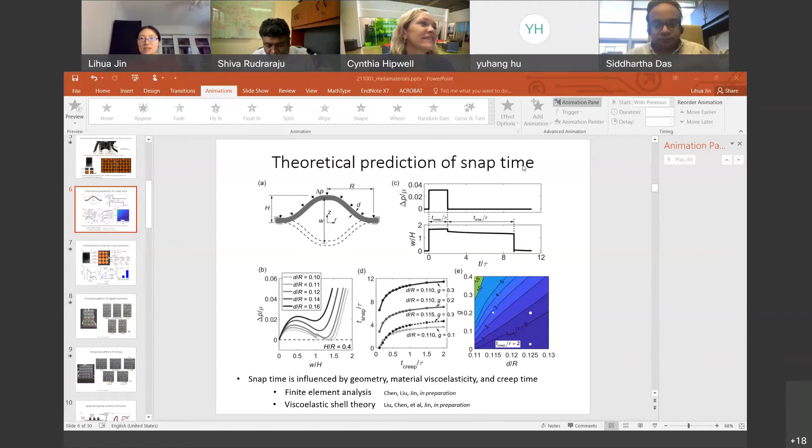And the other question I had is, how small have you actually made the structures for the octopus skin, for the little deforming ones that come up through there? How small have you made them, and what do you think the limit is of where you could go with that? Thank you for the question.

So far, if you check our scale bar, for our unit cell, the radius is around 1 centimeter, so I would say it's pretty large. Actually, in all three metamaterials we show, they are in the centimeter region. But now we are also trying to develop 3D printing to fabricate metamaterial at a much smaller scale. Hopefully in the future we can achieve a much smaller scale.

And what do you predict the property change will be as you scale it down? Do you lose force, like sometimes when you scale down some of these softer things? What are you predicting would happen as you scale?

Right now we are studying a viscoelastic system, so there is no intrinsic length scale in the problem. If you scale it down to say 10 microns, probably no problem. However, if you further scale it down, because it's a soft material, there could potentially be a surface energy effect to some extent. I would predict that if you go to microns, especially based on elasticity and surface energy, you can also define a length scale. That will be the critical length scale below which you will see surface energy effects.